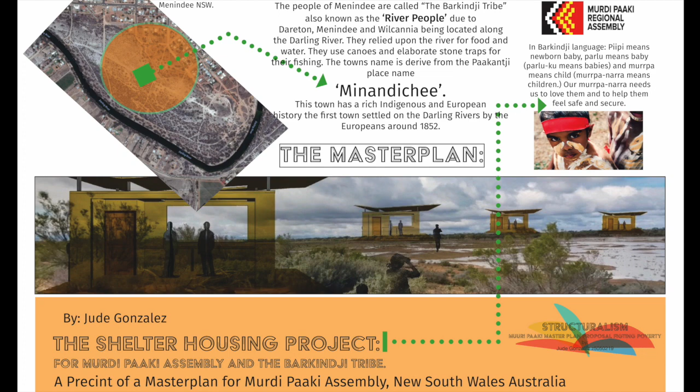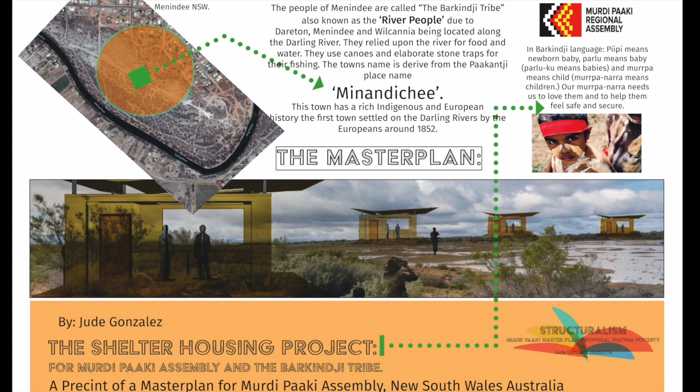The Master Plan. Menindee, New South Wales, is 110 kilometers southeast of Broken Hill and was chosen as an initial pilot location to kickstart an affordable housing proposal for the Murdi Paaki Assembly and their 16 Aboriginal members and their families. Their culture relied on the long stretch of Darling River for food and water.

They use canoes and build elaborate stone traps to catch fish as their main meal. Their history and the places that evolve around their lives and play are given great consideration in this submission. The natural, environmental, and human aspects are crucial information for the compilation of my data.

The vast vacant space, filling it with new structures and the relationship with the context of natural environment, streetscape, townscape, and existing buildings, was considered with a high level of cultural and environmental characteristics.

Connecting the dots: analysis on public concentration, integration, and points of attraction. The natural environment and human aspects related to this urban and natural environment were a crucial factor for me.

Putting in new forms, analyzing the relationship with the context of the natural surrounding, was given first priority, along with a high level of cultural and environmental characteristics.

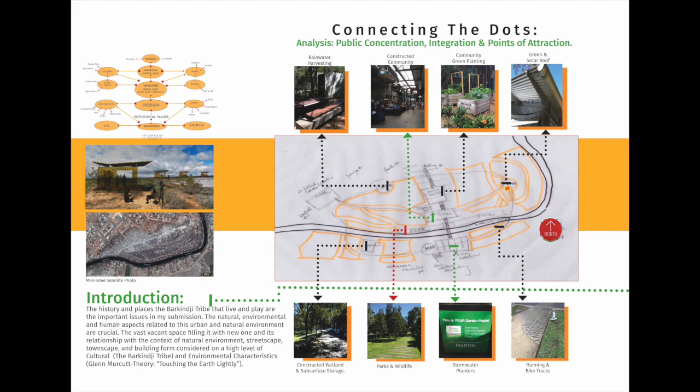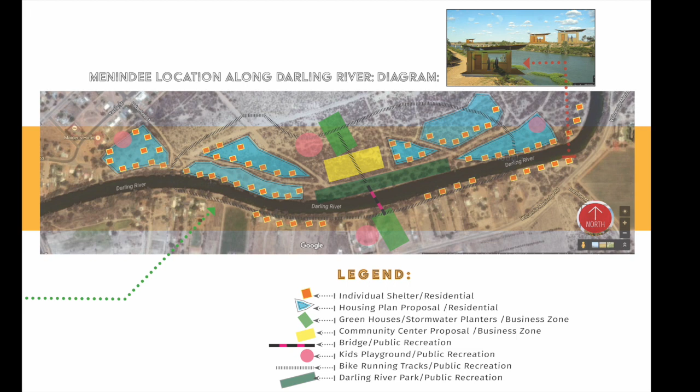Symbolism and respect to the heritage site was also given consideration and was woven into the urban fabric and culture of the land. Analysis on public spaces and concentration, integration, and education with arts and points of attraction was given deep thought, as you can see from the zoning of this area.

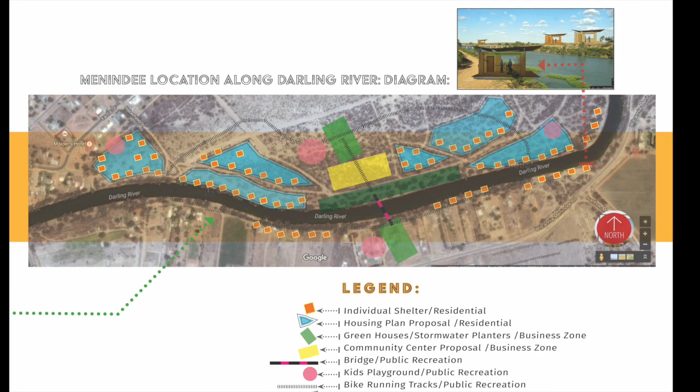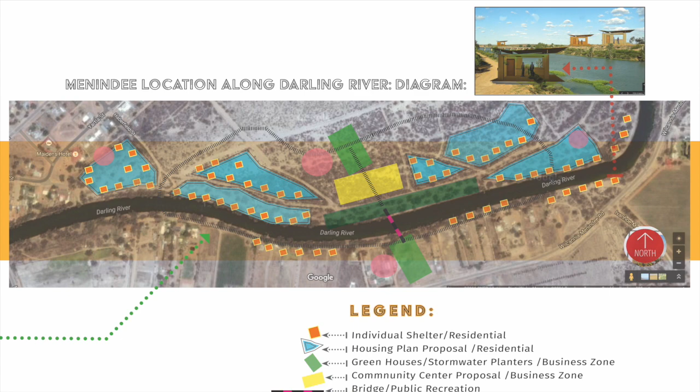It has a green and solar roof, a community center for the arts to pass on information and history, rainwater harvesting for recycling with storm water planters, wetlands, parks and wildlife. There's also a full walking and bike track, all connected and going full circle for a healthier lifestyle and public space.

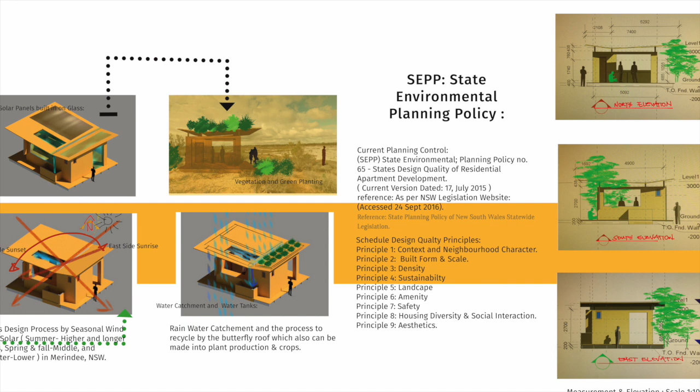Checking and doing research on its State Environmental Planning Policy is also considered, to abide by the laws, process and procedure within the borders and context of the state's design quality standards for residential apartments and dwelling development.

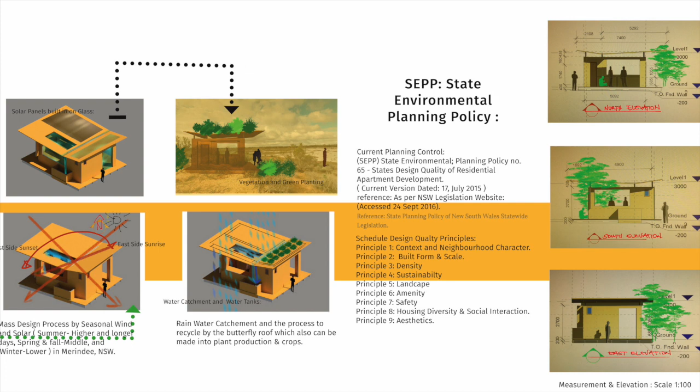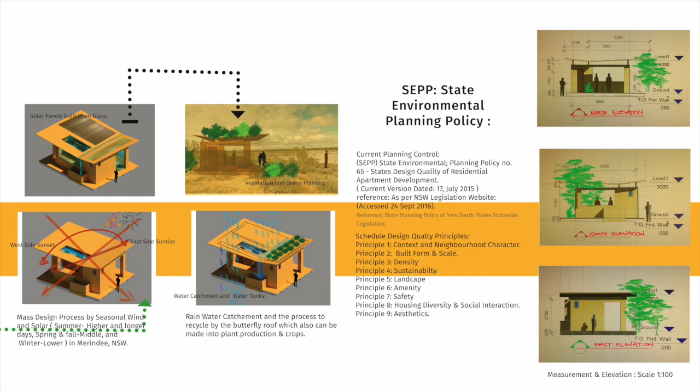Design schedules and the quality principles must be met, with careful consideration to Principle 4, which is sustainability, Principle 5 for landscape, and Principle 8 for housing diversity and social interaction, thus producing a good guide to reflect in order to balance and design aesthetics for the submission.

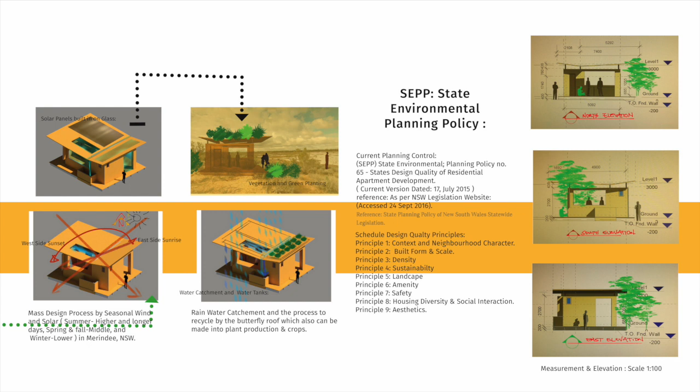The first two pictures are a study for the mass design process by seasonal wind and solar, the phasing and location to maximize the solar potential for ultimate power energy acquisition.

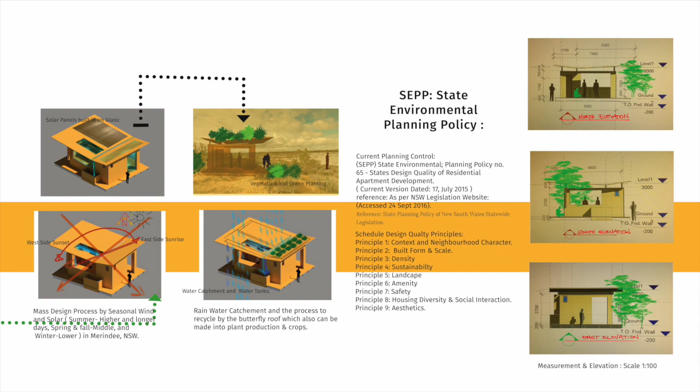The next two pictures show the potential vegetation and green planting, and water catchments and storage designed for sustainable water recycling. Next is the diagram for our energy strategy approach, which I drew by hand, with the initial process of studying our primary energy sources.

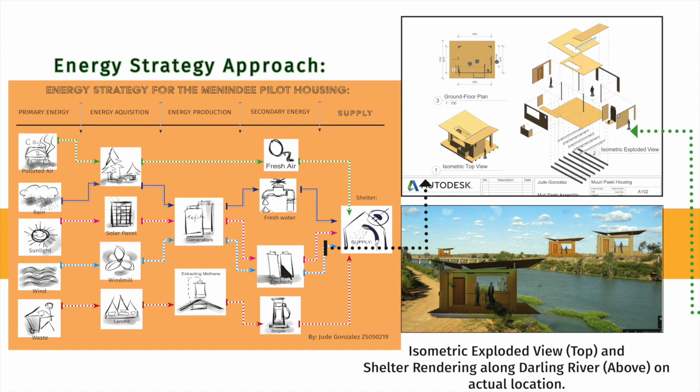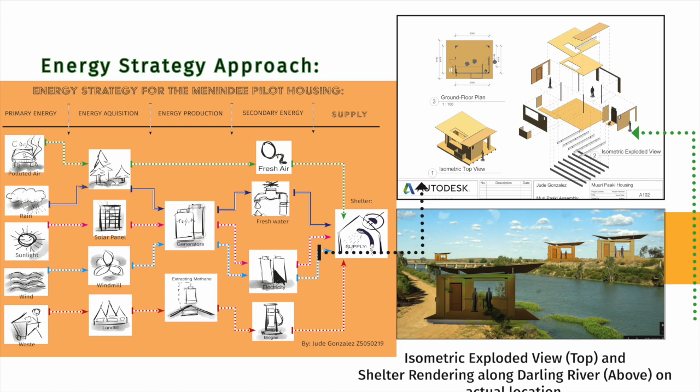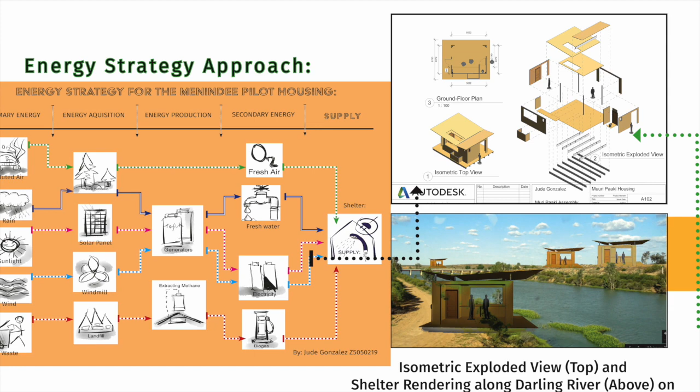Such as polluted air, cloud and rain, sunlight, wind, and natural human waste. I am proposing that the next stage in the energy acquisition proposal is the use of solar panels, windmills, natural forestry, and planting more trees, and also looking at our natural landfill.

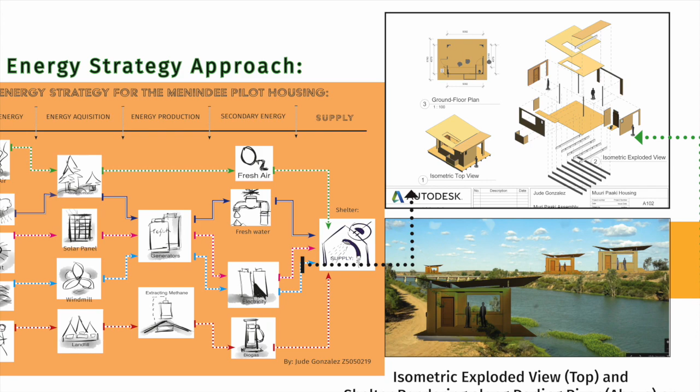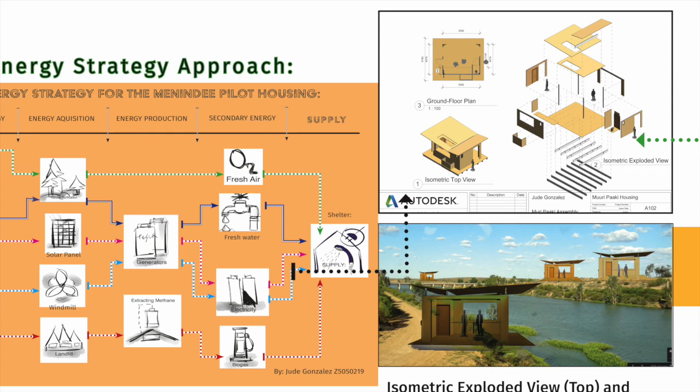Then for the third step is energy production: storing and using state-of-the-art new generators and power devices, like for home electricity storage, with machineries and plants set up for the extraction of methane from human waste to produce gas.

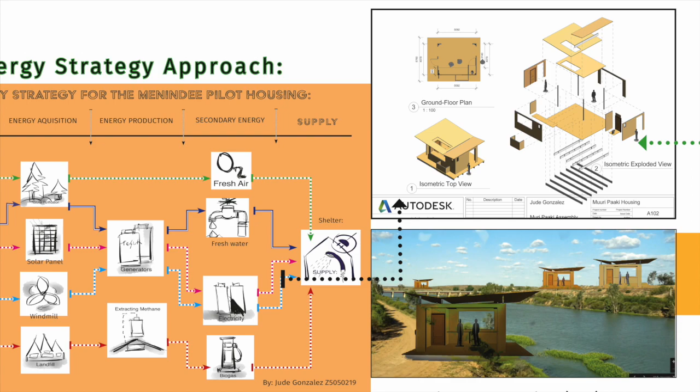The fourth step is having secondary energy so that we will have a constant supply, as shown for our shelter. On your right you can see the exploded view of the materiality, and below a rendered sample if it was placed along the river banks of the Darling River for visualization.

Materiality: upper left is the sample recycled woods and timber framing for the structure, and also the OSB boards, meaning oriented strand boards, and particle boards for proposal. It is an eco 100% FSC engineered wood product formed by layering strands of recycled woods in specific orientations.

Upper right are samples and setup for our solar panels and solar system, generators and batteries. Lower left are samples for portable water container and catchment, flood drainage and collection spouts for water storage and setup.

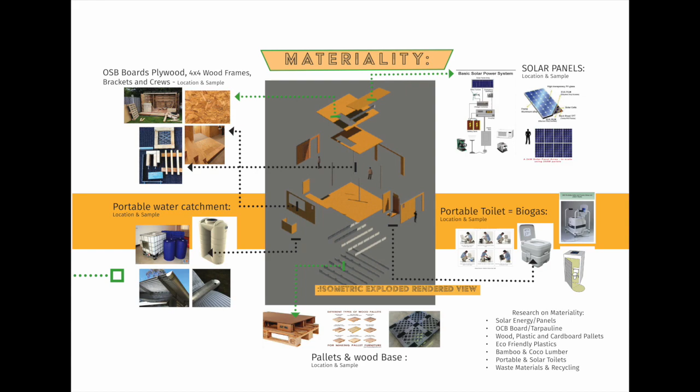On your lower right are our portable toilets set up for human waste recycling to produce methane. And at the base is actually a proposal for the base structure, using wood, recycled plastics, and wood pallets for the base of the house.

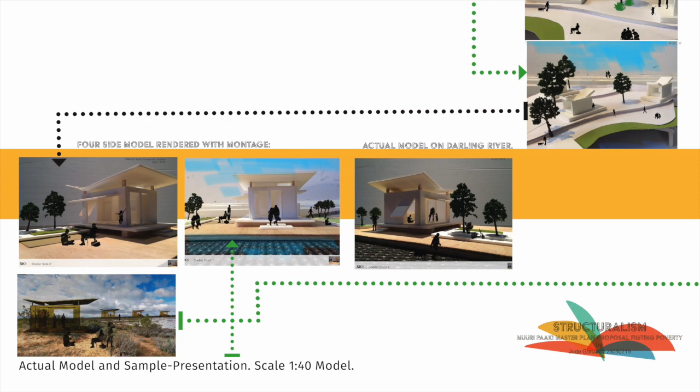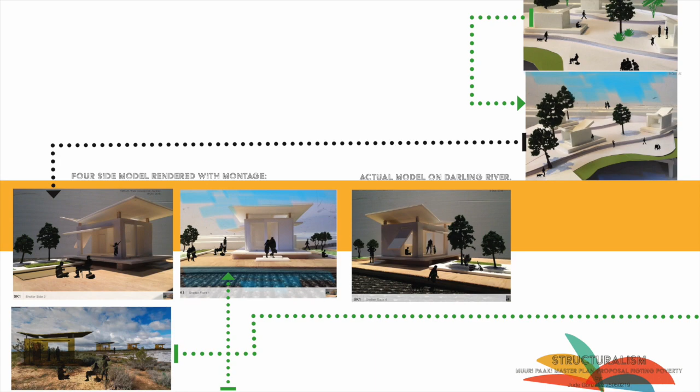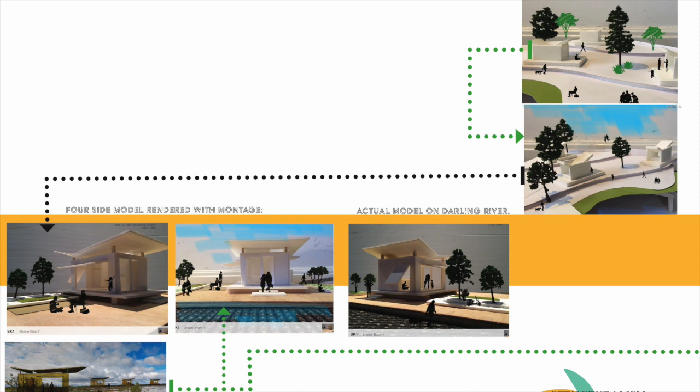The shelter is constructed along the river banks of the Darling River, where the Aboriginal families work for their main source of food and water, and also to maximize all the natural features such as solar and wind.

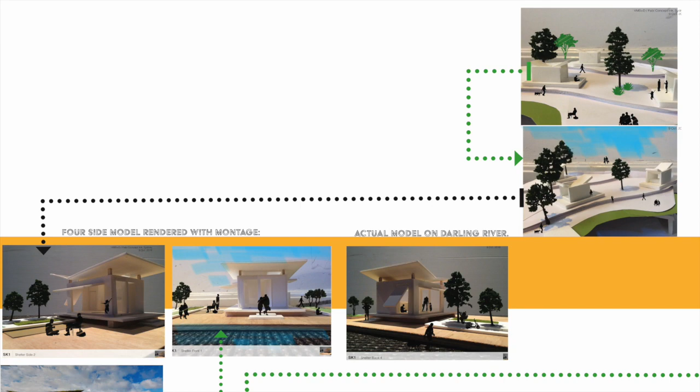Community Center: as discussed from the early stage of planning, the community center was given special consideration because in the Murdi Paaki Assembly they have a very active and healthy community and outback theater for the young Aboriginal members. In partnership with Trax and West Darling Arts since 2009, it serves as a good platform in injecting diversity and creative opportunities, and they need performance space.

This is good in a way because it connects all members via performing arts that strengthen their culture, and helps them share and pass down their histories and stories.

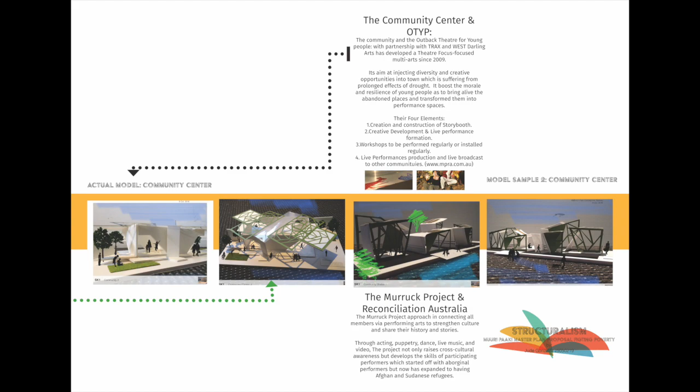They have puppetry, acting, dance, live music, and video. It raises cross-cultural awareness that develops skills of participating performers, not just for the Aboriginal community but expanded now to Afghan and Sudanese refugees.

Budget analysis and proposal: after careful consultations with members of the Australian Institute of Architects, Master Builders Association, and the Housing Industry Association of Australia, I was able to get information on the budget and cost to produce the shelter proposal.

In conclusion, careful consideration to the respect and rights of our Indigenous Australians, and the need to change their broader cultural and ecological design factors studied, plus the inclusion of serious employment and usage of more sustainable strategy.

This is for the good of the professional and academic aspects of design in general, and a necessity to enhance ecological designs within a creative discourse, and to devise design and strategies for now and future practices.